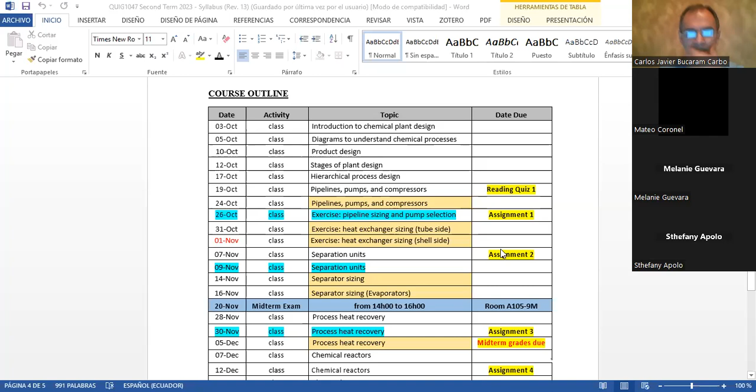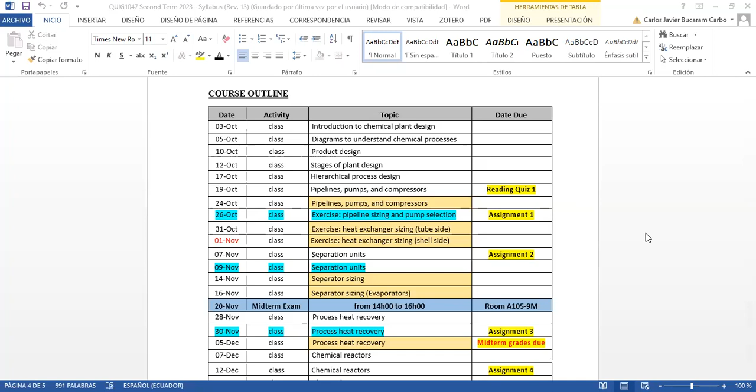We've been discussing pipelines, pumps, and compressors since the 19th, 24th, which was Tuesday, and today hopefully we'll finish the discussion on pipelines, sizing the pumps, and pump selection on this topic of pipes, pumps, and compressors.

Starting on the 31st, we'll have class, and also possibly on November the 1st. As you know, November 2nd is a local holiday, as well as November 3rd. So I sincerely ask you guys to have class on November 1st. It depends on how much progress we make on the 31st, but we might need to have class instead of on the 2nd, because I don't want to unless you guys want to have class on the 2nd, in which case I'll be happy to, since I'm not leaving the city. If you have family commitments and are leaving the city, we can have the class on the 1st instead. I'd appreciate your feedback rather than imposing my own preference, whether you'd prefer class on the 1st or the 2nd.

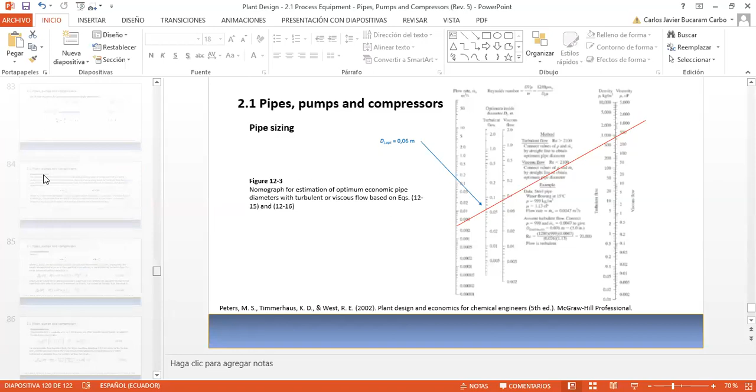Nos dice así. Tenemos un par de ejercicios más, unas recomendaciones generales y luego el tema de Net Positive Suction Head, que es el cabezal de succión positiva.

Cabezal quiere decir columna de agua. Le dicen cabezal, se expresa como cabezal, y si usted habla con un proveedor de bombas, le va a preguntar el caudal y el cabezal. Por cabezal significa la presión o la columna de agua que usted requiere de presión de descarga de la bomba.

Esto es común en los proveedores locales, como Maquinarias Henríquez, como La Llave y otros proveedores más. Eso es usual y es común.

Y los proveedores van a esperar que usted tenga claro su requerimiento, y ellos le pueden asesorar en cuanto al material y al tipo de bomba que ellos tienen disponible, porque en ocasiones ellos importan y tienen en stock ciertas bombas con ciertas características, pero no todas, porque no quieren llenarse de stock que no sale, sino tener stock comercialmente viable: importan un equipo, lo tienen en corto tiempo, lo venden, y esa ganancia la usan para importar otros equipos más. Así funciona todo negocio en realidad.

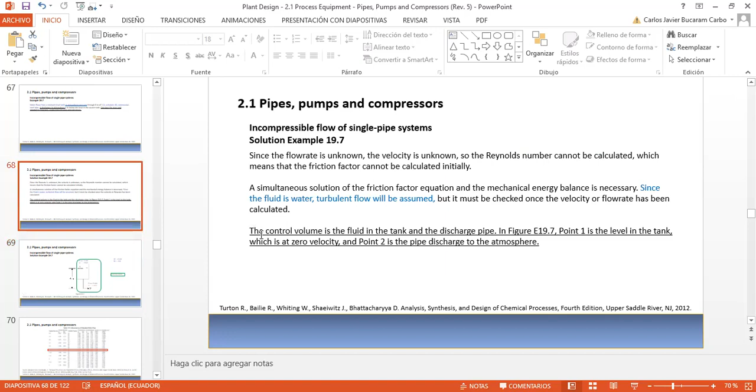What we observe: there is no pump in this system. We only have to analyze what it's asking, which is the velocity, just to make sure. Calculate the mass and volumetric flow rate, neglecting entrance and exit losses. So there is no pump in this system, as you see here.

We know that the source tank is open to the atmosphere, meaning the pressure is 1 atmosphere. This is going to discharge to the atmosphere since there is no pump, so the difference in pressures is going to be 0. The initial velocity on the surface of the source tank is 0, because we can assume it's wide enough so that there is no movement on the surface. But there will be some velocity on the discharge.

So we know that delta P will be 0, because both the discharge is to the atmosphere and the source tank is to the atmosphere. There is no pump, so the work of the shaft is also 0 watts. That's what you see there.

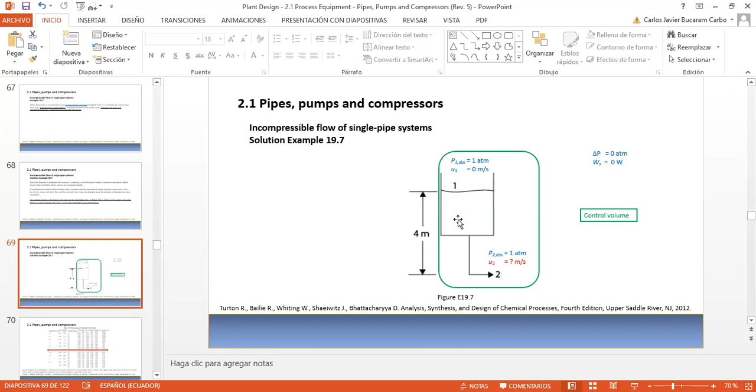So we only have a few terms. The pressure term is 0. We will apparently have some kinetic velocity term, even though it's just 4 meters, because the height is small. It could be considered or it could be neglected. It depends on what the authors consider.

The potential energy term will need to be considered, and the friction term will need to be considered. The power term, the power of the pump, where you have the efficiency, the power of the pump in energy per time, in kilowatts, divided by the mass flow rate in mass per time, that term will be 0 because there is no pump.

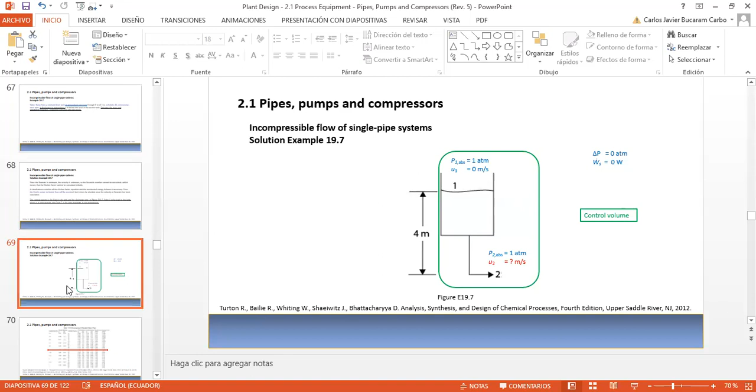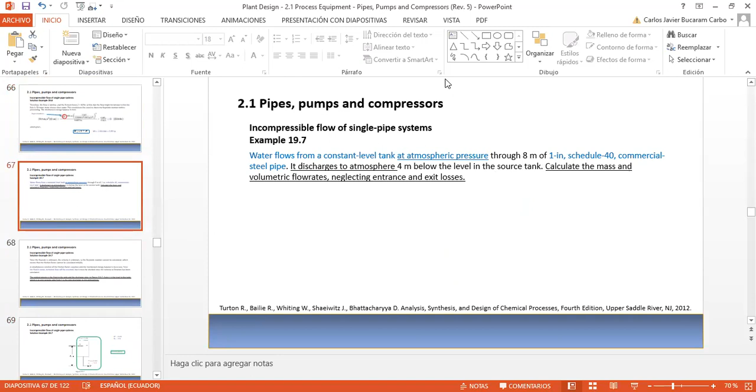We also know that the pipe, let me check really quick. It says it's a 1 inch Schedule 40 commercial steel pipe. So if we check on the pipe, which is here, maybe we can see this a bit better.

The inside diameter is 26.64 millimeters. This table, with all the accompanying sizes, I believe is just part of table 19.1. I think we did review the full table. It goes all the way from very small diameters to big diameters, above 14 if I remember. But we don't need to go all the way — we'll just focus on the diameter of the commercial steel for this particular problem, which was 1 inch.

So the inside diameter, Alexander, is 26.64 millimeters. If we divide by 1,000, that means 0.02664, if I'm correct. That will be the inside diameter.

Okay, so these are the formulas that we have. As we know, there will be no delta P term, or delta P over rho, in the case of constant density. We need this term, we need this term, but we don't have this term because there is no power, there is no pump.

We could consider, if we want to do a strict analysis, some velocity from the surface of the tank all the way to the discharge of the pipe. Although since this is not forced convection — the fluid is not being forced, it's only flowing by gravity — and the height is not that significant, only 4 meters, perhaps this term could also be neglected.

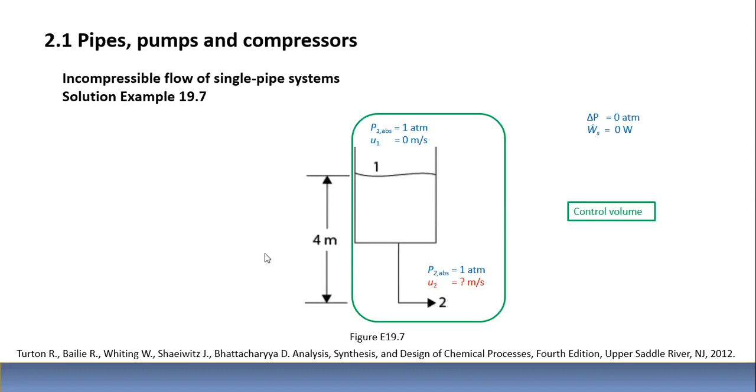Here we know that the roughness factor for commercial steel, if this is in SI units, will be 0.046 divided by 1,000. I believe we're working in SI units. Yes, these are all SI units. So this will be 0.046 divided by 1,000, or 4.6 times 10 to the negative 5 meters, if I'm correct.

Let's check in here. So there we go. There is no velocity in the source tank. There is just velocity at the discharge of the pipe. So that's why the difference between U2 minus U1 is 0.

Squared divided by 2, this is the kinetic energy term. G delta z is a potential energy term. This is the friction term. There is no power term. Is equal to 0. Here, there is a mistake, or an error.

This is plus. There should be a plus. If you follow this expression on the left, you'll see that the expression on the right is missing a plus, because the kinetic energy term is added to the potential energy term, which is added to the friction term. This is not equal to the rest. This is all added up, and everything added up is equal to 0. That's a correct way to interpret this. Okay, so far so good.

But now you could also observe that the friction term is missing 2 things. There are 2 unknowns in here. The Fanning friction factor is not known, because as you see here in equation 19.7b, it is expressed in terms of the Reynolds number, which in turn is expressed in terms of the velocity. We have, what is that? Inside diameter, density, velocity divided by viscosity.

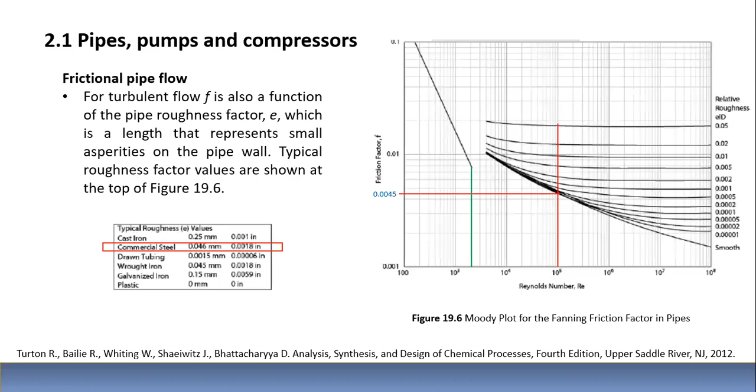Well, the Reynolds number, according to this definition, uses the internal diameter. The density was assumed as 1,000 kilograms per cubic meter, and the viscosity for a non-viscous fluid was assumed as 0.001 kilograms per meter per second. So the Reynolds number was calculated once we knew the correct velocity. The Fanning friction factor, the Reynolds number, and the velocity were found, so we could easily estimate the volumetric flow rate and the mass flow rate.

Now, if we check this on Excel, to see exactly how to go about solving a problem like this, let me show and share this with you guys on Excel.

Okay, so this is example 19.7. You guys can see the Fanning friction factor, we see the velocity V, and based on that velocity we see M, the first and second terms in the friction factor defining equation, and this is what was obtained.

So we're seeing that there was an initial guess. Let me see which one is being used there. Yes, there was an initial guess for the friction factor, which was used to obtain U2.

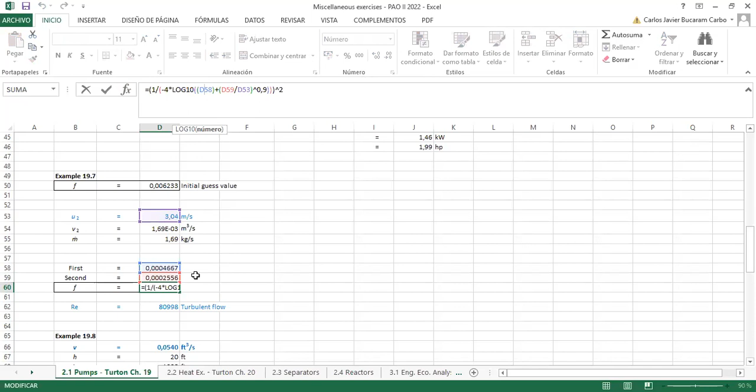So you could do this on Excel. Finally, the Reynolds number also uses the velocity here. We take the velocity as a guess value in order to calculate the friction factor, and then the rest could be calculated. So this is a very simple way to estimate this.

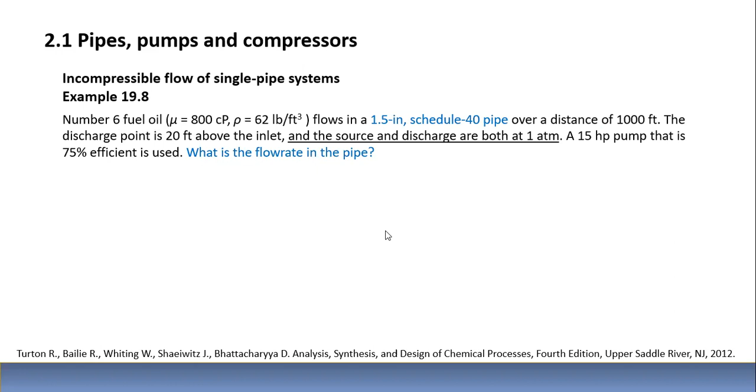It says the volumetric flow rate is an unknown variable. Given the high viscosity, once again, an 800 centipoise fluid is a very viscous fluid. That's why fuel oil 6, bunker fuel, is a very viscous fluid.

It says given the high viscosity, laminar flow is assumed, and that is a correct assumption. So if we assume laminar flow, there is a consequence, and it has to do with the correct expression to determine the Fanning friction factor. If this is a viscous fluid and therefore a laminar flow regime, that means we're not going to use the Blasius equation. We're going to use the Hagen-Poiseuille equation for determining the friction factor in a laminar flow regime, which will be 16 divided by the Reynolds number. Pretty much that's what it would be.

And the Reynolds number should be expressed in terms of the volumetric flow rate. That would be 16 divided by 4 times volumetric flow rate times density, and then pi d mu goes to the numerator, multiplying times 16. So it will be 16 divided by the Reynolds number in terms of the volumetric flow rate. Okay, so far so good. So if we do that, we'll have an expression like this.

This is the potential energy term, the power term, and then this friction term: 32 F L V squared divided by pi squared d to the 5th power. This comes from the friction term.

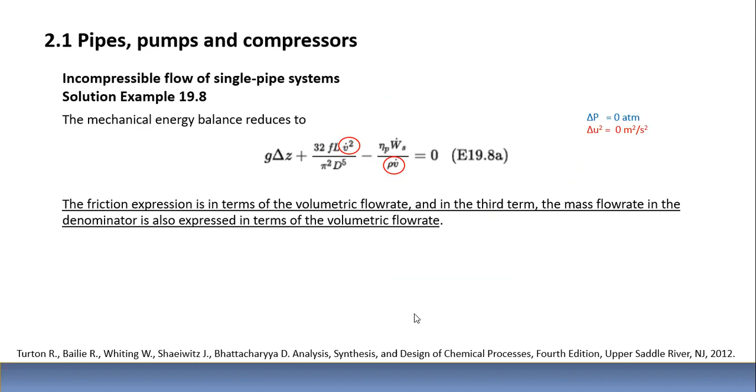But the Fanning friction factor is going to be 16 divided by the Reynolds number. That's why you don't see the friction factor here anymore — it has been replaced by the expression of the Reynolds number.

So the friction factor will be 16 divided by the Reynolds number, which is 4 times the volumetric flow rate times density, divided by pi d mu. So this is pretty much 16 over the Reynolds number.

And this is F. So we have 32 times F times L times the square of the volumetric flow rate, divided by pi squared d to the 5th, as the expression here.

Now you can cancel out pi, since you have pi here but only to the power of 1. For d, you have d to the power of 4. For the volumetric flow rate, you can cancel this out to get volumetric flow rate to the 1st power.

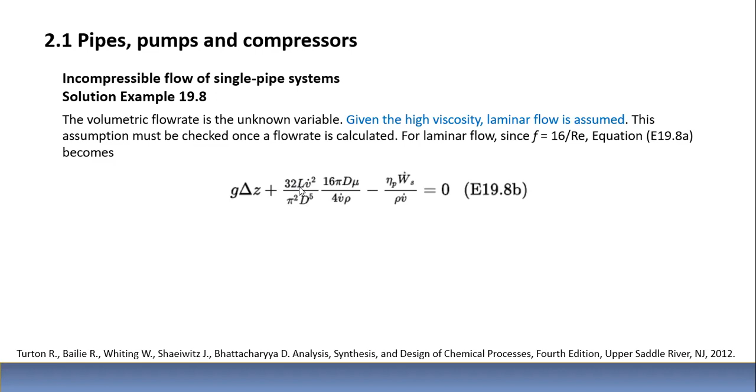Then you have 4 times 32, since you cancel this out, which is 128. And then you obtain what you see here. This is the potential energy expression, and this will be the friction term.

This includes the friction factor in terms of 16 over the Reynolds number for a laminar flow regime, using the Hagen-Poiseuille equation, and the power term also expressed in terms of the volumetric flow rate.

Once again, we need to guess a value, and for this we will use an Excel spreadsheet. Once we add the 3 terms, it should come to be 0. When that happens, we have found the correct volumetric flow rate in cubic feet per second.

And then the Reynolds number can be expressed in terms of the volumetric flow rate. We could use that calculated volumetric flow rate to determine its value. It comes out to be 59.1.

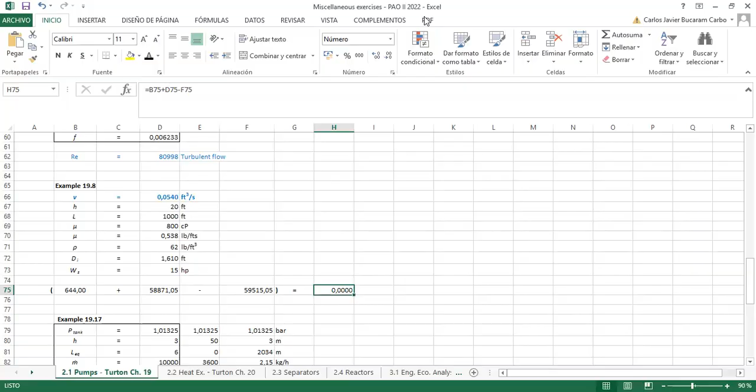Vamos ahora a recomendaciones para solucionar este tipo de ejercicios, recomendaciones generales. No sé si las escribí basadas en el libro o si simplemente estaban en el libro, no recuerdo para ser exacto. No sé si la escribí como recomendación para la clase de aquel entonces y la dejé aquí, pero creo que son recomendaciones buenas de meditar para la resolución de este tipo de problemas.

Nos dice: draw the specific conditions described in the problem, start with the mechanical energy balance, determine which terms of the equation 19.5 are not applicable to your problem, confirm if the remaining terms of the equation 19.5 are indeed applicable. Puede decir si usted necesita el término de velocidad, de presión, si usted necesita el término de potencia, posiblemente no lo necesite. Tiene que estimarlo según la realidad de su problema, la descripción, el enunciado de su problema.

Determine if the flow is turbulent or laminar using the Reynolds number. Obtain the friction value using the expression applicable to your flow condition, that is equation 19.16 for turbulent flow, equation 19.15 for laminar flow. Para flujo laminar se usa la ecuación Hagen-Poiseuille, 16 sobre el número de Reynolds. Para flujo completamente desarrollado, turbulento, se usa la ecuación de Pavlov y sus demás compañeros de investigación, citado por Levenspiel, eso lo vimos el martes pasado. Es una ecuación un poco más complicada, ya la hemos citado varias veces, ya ustedes están al tanto de esto.

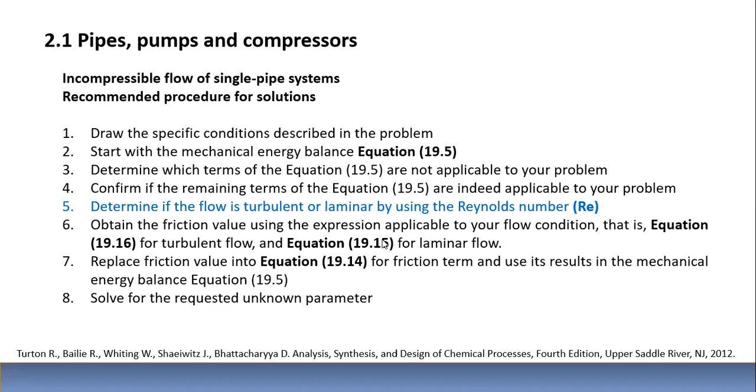Replace the friction value in equation 19.14 for the friction term and use its results in the mechanical energy balance equation 19.5. Solve the requested unknown parameter. Son recomendaciones generales y quizá puedan servir.

Ecuaciones que hemos visto. Aquí está la ecuación para flujo turbulento, de Pavlov y sus compañeros de investigación, se dice coworkers en inglés, sus co-trabajadores o co-investigadores. Normalmente las investigaciones y los papers que se publican, quizá como el paper que ustedes leyeron, se hacen en grupos de investigación. Pavlov fue quizá el mayor contribuyente a esa investigación, por eso tuvo el privilegio de aparecer como el primer autor, pero los demás autores contribuyeron en cierto modo, por eso son citados en el artículo. En el caso del flujo laminar, pues solo se lo cita.

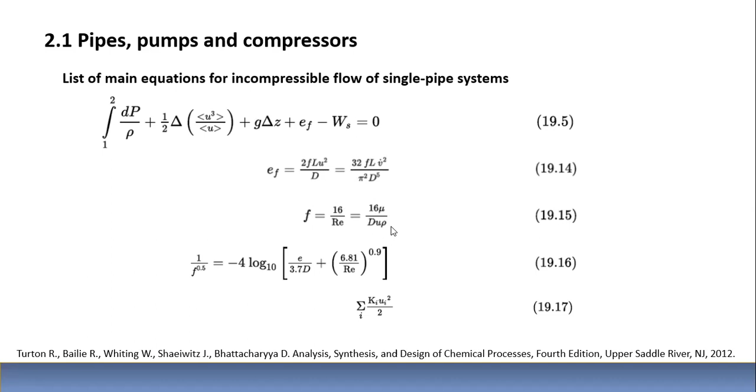Está Hagen-Poiseuille, que son los dos autores, el señor Hagen y el señor Poiseuille. Ellos determinaron que esta era la expresión apropiada para el flujo en el régimen laminar. Muy bien, y demás expresiones.

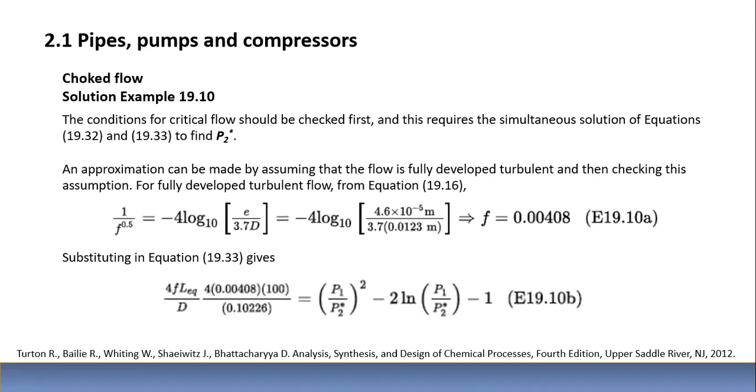Flujo compresible nosotros nos vamos a saltar porque el tiempo nos apremia, y flujo estrangulado también nos vamos a saltar. Entonces vamos a caer específicamente en Net Positive Suction Head, NPSH, y con eso concluimos. Nos dice: there is a significant limitation on pump operation called Net Positive Suction Head, NPSH. This is the head, el cabezal, como le dije, columna de agua en pies o en metros. This is the head that is needed on the pump feed, en el lado de la succión.

Usted necesita cierto cabezal en la succión, porque la bomba no puede succionar gases. Una bomba centrífuga no puede succionar, y también una bomba de desplazamiento positivo no puede succionar, se va a terminar estropeando. Una bomba industrial tiene el cabezal, su eje conectado con el eje del motor, ambas sobre una base, y esto conectado con un matrimonio. El matrimonio es la conexión entre el eje del impulsor o impeller en inglés y el eje del motor de la bomba, un dispositivo de lado y lado que acopla ambos ejes, y lo llaman matrimonio. Una bomba así puede costar sobre los $10,000.

Usted no quiere arruinar el eje de una bomba así, que no va a dejar de costar algunos cientos de dólares. Sería inexcusable que, conociendo que una bomba centrífuga no bombea gases, no tomemos las precauciones para que en la succión nos aseguremos que está saturado el líquido con suficiente presión en la succión para que la bomba pueda arrancar y operar, y pueda desalojar o desplazar líquido.

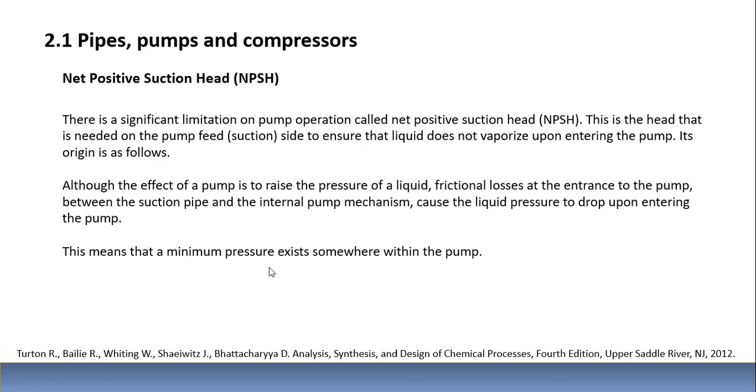This is the head that is needed on the pump feed side to suction side to ensure that liquid does not vaporize upon entering the pump. Its origin is as follows. Although the effect of a pump is to raise the pressure of a liquid, frictional losses at the entrance to the pump, between the pump, the suction pipe, and the internal pump mechanism, cause liquid pressure to drop upon entering the pump. This means that a minimum pressure exists somewhere within the pump. If the feed is saturated or nearly saturated, the liquid can vaporize upon entering due to the internal pressure drop. This causes formation of vapor bubbles.

These bubbles rapidly collapse when exposed to the forces created by the pump mechanism, called cavitation. This process usually results in noisy pump operation that, if it occurs for a period of time, will damage the pump. As a consequence, regulating valves which lower fluid pressure are not normally placed in the suction line to the pump. No ponemos válvulas que regulen el flujo en el lado de la succión porque no queremos estrangular el flujo en el lado de la succión.

Hay un video de menos de un minuto, que aunque el tiempo apremia, puede ser que lo podamos ver. Es un video que ilustra el tema de la cavitación. Vamos a ver si lo compartimos aquí. Es un video corto y lo podemos ver.

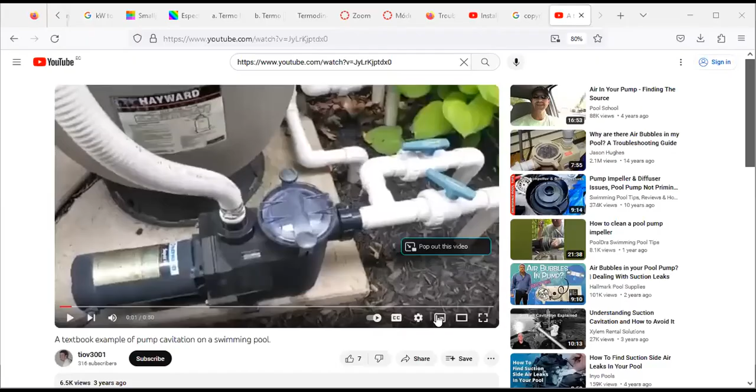Muy bien, corremos esto. Escuchen y miren lo que está ocurriendo.

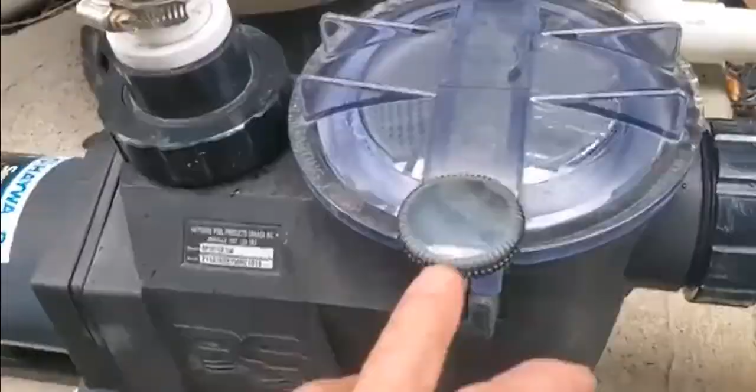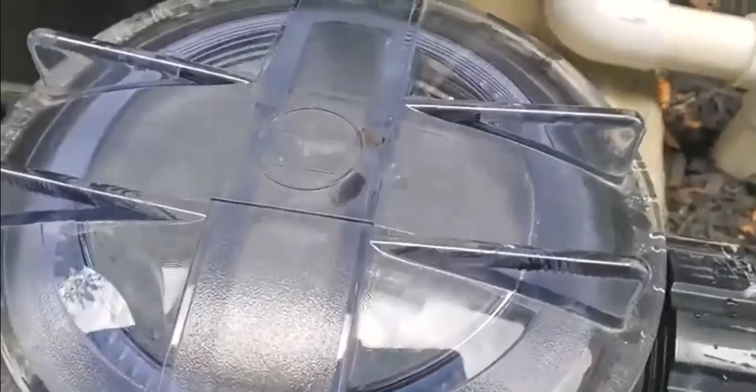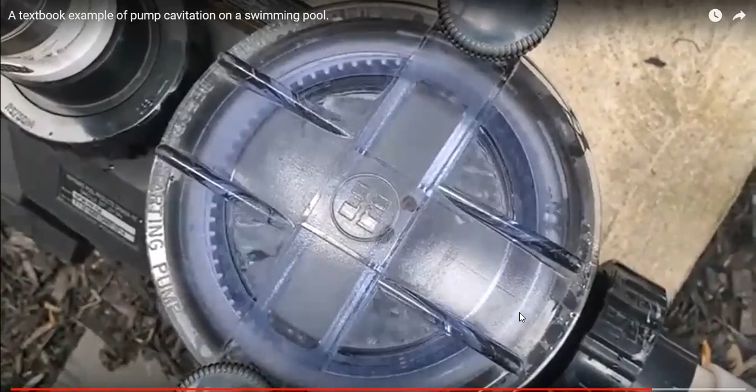Lo que hizo él es estranguló el flujo de salida. Sí, estranguló el flujo de salida y se pudo mejorar. ¿Vieron el escándalo que estaba haciendo la cavitación de esa bomba?

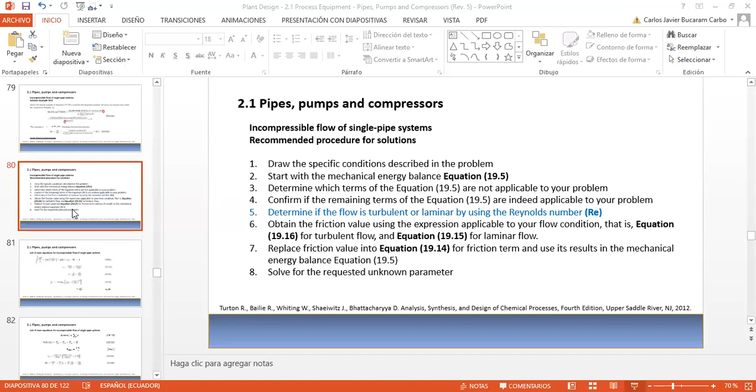Muy bien, vamos avanzando en Net Positive Suction Head. Nosotros vamos aquí, estamos aquí, correcto. Pump manufacturers, vamos a ver este tema acá.

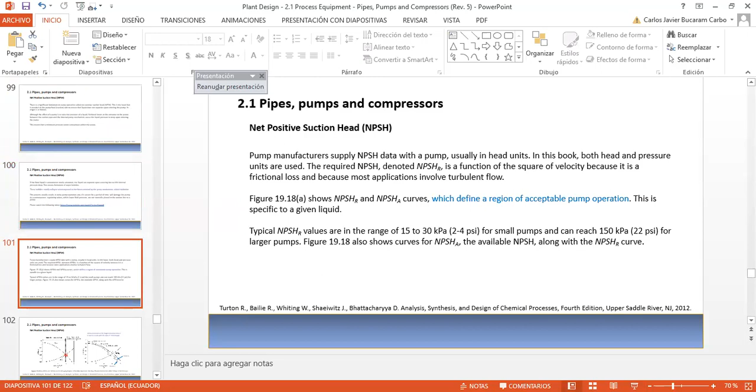Pump manufacturers supply net positive suction head data with the pump, usually in head units. In this book, both head and pressure units are used. The required net positive suction head, NPSHR, is a function of the square of velocity because it is a frictional loss, since most applications involve turbulent flow. Figure 19.18A shows net positive suction head required and net positive suction head available curves, which define a region of acceptable pump operation. This is specific to a given liquid. Typical NPSHR values are in the range of 15 to 30 kilopascals for small pumps and can reach 150 kilopascals for larger pumps.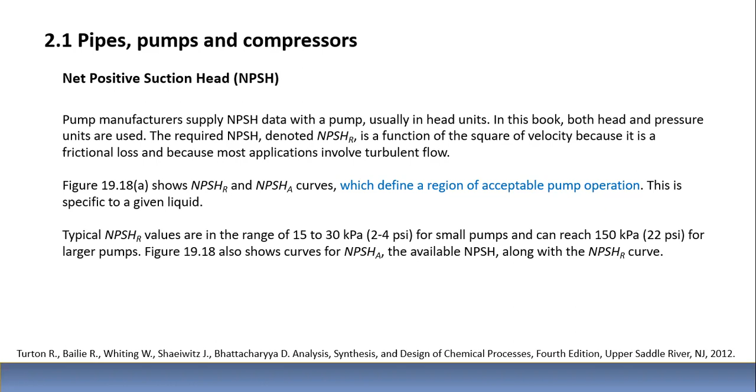The available net positive suction head is defined, as you see in equation 66, as the inlet pressure minus the vapor pressure. It is required that the available NPSH be bigger than the required NPSH to avoid cavitation. Cavitation is avoided if operation is to the left of the intersection of the two curves. It is physically possible to operate to the right. Puede usted operar hacia la derecha de esta intersección de las líneas requeridas y disponibles.

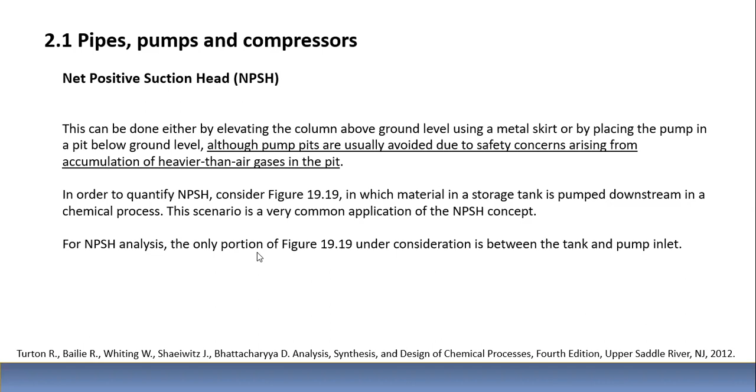In order to quantify NPSH, consider figure 19-19, in which material in a storage tank is pumped downstream in a chemical process. This scenario is a very common application of the NPSH concept. For NPSH analysis, only the portion of figure 19-19 between the tank and the pump inlet is considered.

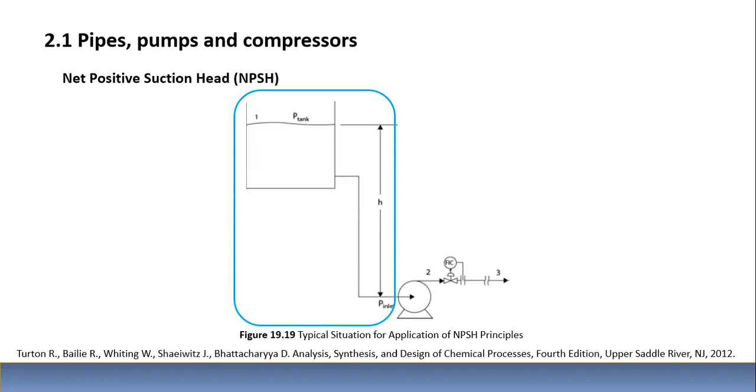This means that the pump inlet pressure equals the tank pressure plus the static pressure minus the frictional losses in the suction side piping. Therefore, substituting equation 67 into equation 66, we solve for the pump inlet, which is equal to NPSHA plus P star.

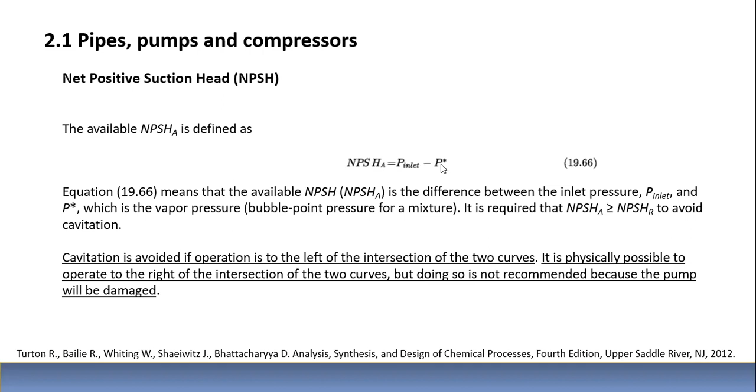And then we move P star to the right, we end up with equation 19-68, which is this expression: the available net positive suction head is equal to the tank pressure plus the static pressure minus the friction term minus the vapor pressure. This is an equation of a concave downward parabola of the form A minus BU squared.

As illustrated in figure 19-18B, curve A, we have that curve here, this concave downward curve is curve A. The intercept is expressed in this expression, and this is the slope, expressed by this expression.

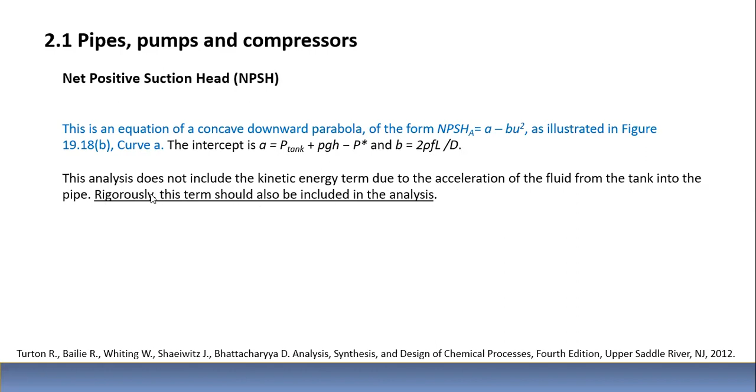This analysis does not rigorously include the kinetic energy term due to the acceleration of the fluid from the tank into the pipe. This term should also be included in the analysis. We're almost done.

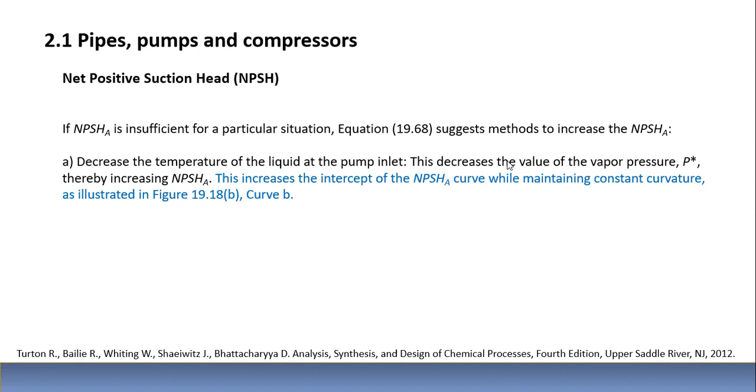If NPSHA is insufficient for a particular situation, equation 19-68 suggests methods to increase the net positive suction head. Decrease the temperature of the fluid at the pump inlet, because this will decrease the vapor pressure. I'm going to go a bit fast here.

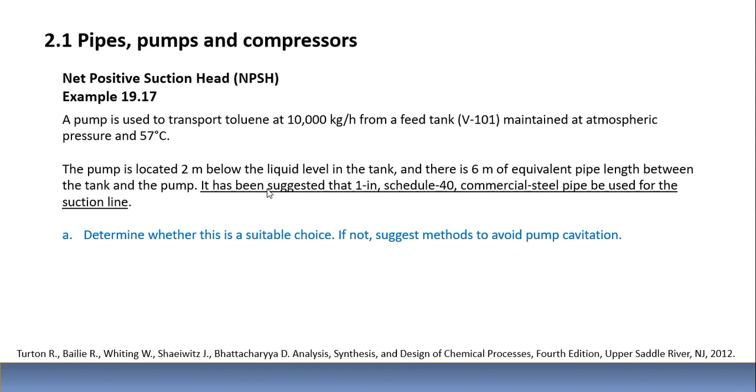Básicamente eso es, un tubo de 1 pulgada cédula 40 de acero comercial. Y aquí usamos la ecuación 68, si estoy correcto. The following, esta es la ecuación 68. Correcto. The following data can be found for toluene.

Tenemos la ecuación de presión de vapor del tolueno, la viscosidad del tolueno a 57, la densidad del tolueno a 57, y para un tubo de cédula 40 de 1 pulgada, estas son las dimensiones. El factor de rugosidad, 0.0011, el diámetro interior, 0.02664 metros. Therefore, the velocity of toluene in the pipe can be found to be 5.73.

Haciendo las estimaciones, the Reynolds number is about 426,000. The friction factor is 0.005 at 57 Celsius. The vapor pressure is found to be 0.172.

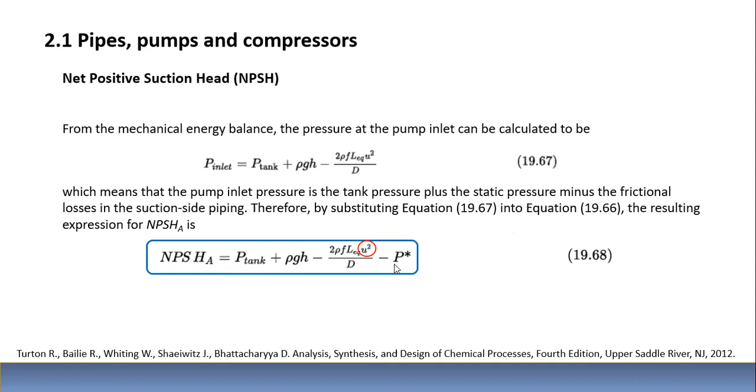Entonces, haciendo el cálculo, y lo vamos a ver también en Excel, de la ecuación 68 que tiene estos cuatro términos: el término de la presión del tanque, el término de presión estática, el término de fricción en términos de velocidad, y el término de presión de vapor a una determinada temperatura, se obtiene que con un tubo de 1 pulgada, el cabezal disponible positivo en la succión es 0.37 bares.

This is shown as point A on figure 1918B. At the calculated velocity, figure 1918B shows that the net positive suction head is 0.4. Es decir, según este gráfico, el punto A, que es para un tubo de 1 pulgada, cédula 40, 2 metros con fluido a 57 centígrados, nos da aproximadamente 0.4.

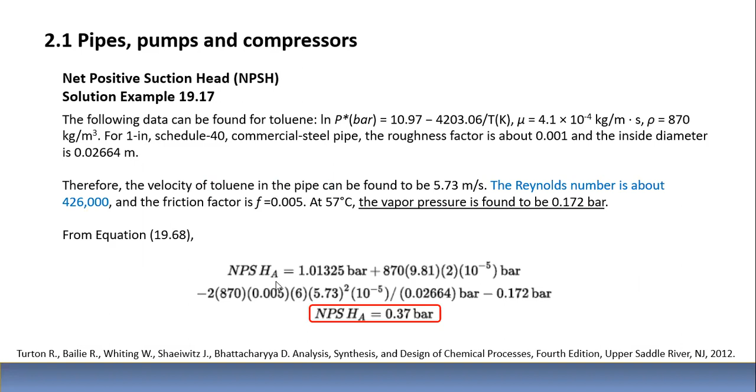Pero el disponible calculado, porque este es net positive suction head available, el disponible es 0.37. El disponible tiene que ser un poco mayor al estimado mediante el gráfico que usted ve en la línea que está en celeste.

Therefore, there is insufficient NPSHA. This means that the 1-inch schedule 40 pipe is unacceptable for this service. The obvious solution is to use a larger diameter pipe for the suction of the pump. The calculated velocity, 5.73, is far in excess of the typical maximum liquid velocity.

Intercambiadores de calor se usan a velocidad 1 metro por segundo, vea usted. 5.7 es simplemente una velocidad excesiva debido al estrangulamiento que está teniendo por el tubo de un diámetro pequeño.

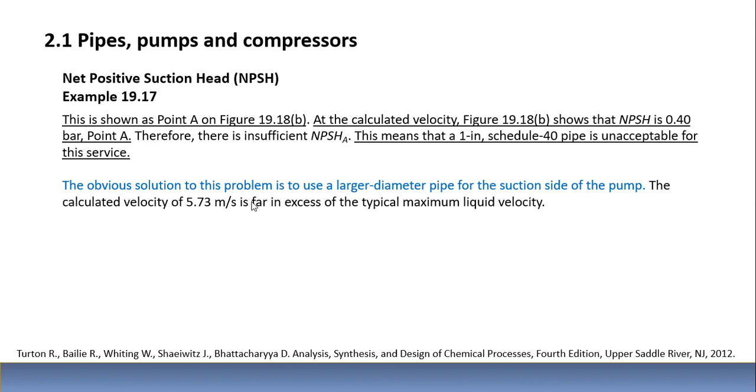The frictional loss, sí, con eso creo que terminamos. Vemos el Excel y ahí acabamos. The frictional loss in the 6-meter suction pipe is approximately 0.64.

If a 2-inch schedule 40 pipe was used for the suction line, then the frictional loss would decrease to 0.02 bars, and NPSH would increase to about 0.99, which is far in excess of the required NPSH.

Another method, como vimos, el requerido es 0.4, ¿no? Si se dobla el diámetro de tubería a 2 pulgadas, tendríamos un NPSH-A de 0.99 en lugar de 0.37, y estaría muy por encima de 0.4.

¿No? Another method for increasing NPSH-A is to increase the height of the liquid in the tank. If the height of the liquid in the tank is 3 meters, the 1-inch schedule 40 pipe at the same temperature will give 0.445. Y eso lo podemos ver aquí en point B.

En esta curva, que es de 1 pulgada, cédula 40, a 3 metros y 57 grados, es decir, es igual a la de acá, el mismo tubo con la misma temperatura, pero en lugar de 2 metros, tiene 3 metros. Mire cómo la curva del NPSH disponible se corrió hacia la derecha.

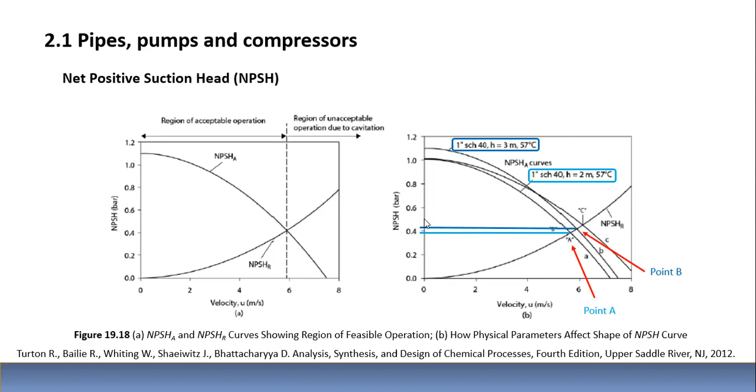Y nos dio también un NPSH de aquí, aproximadamente 0.45 o algo así. Y nos dice que nos dio acá 0.445 según seguramente la fórmula 19.68. This is shown as point B in figure 1918.

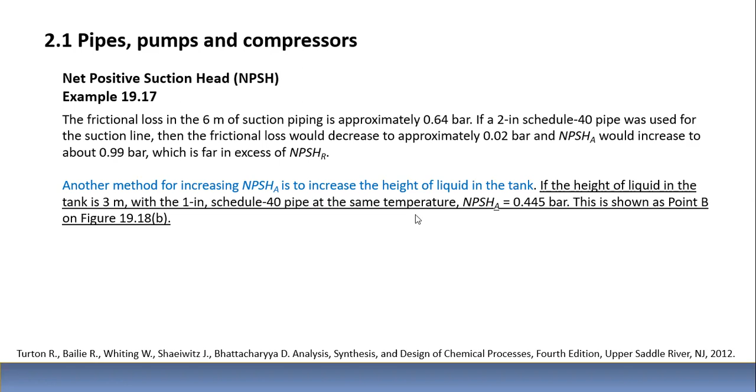Es decir, sería más conveniente, en otras palabras, levantar la tubería. Es más caro cambiar todo el tubo, reemplazar el tubo, y es más fácil añadir 1 metro más de tubo del mismo tipo y conseguir un resultado más aceptable. Finalmente tenemos estas tres.

Vamos al Excel y se acabó. Dice, the derivation, ojalá no se enoje conmigo, Fernando, tengan un poco de misericordia, ¿no? Me he pasado unos minutos.

The derivation of equations for determining optimum economic pipe diameter is presented in chapter 9. This is Peters. Estamos en Peters Timmerhaus, es un par de diapositivas porque es un resumen muy interesante en cuanto a determinación del diámetro óptimo, basado en el número de Reynolds y el diámetro de la tubería.

The following simplified equations can be used for making these design estimates, for the design estimation of a pipe's diameter. For turbulent flow above Reynolds number 2100, with internal diameter above or equal to 1 inch, this would be the equation.

For viscous flow with Reynolds number below 2100 and internal diameter equal or below 1 inch, this would be the appropriate equation. Where D i,opt is the optimum pipe diameter, and V is the volumetric flow rate in cubic meters per second, rho is the fluid density in kilograms per cubic meter, mu sub F is the fluid viscosity in pascal seconds.

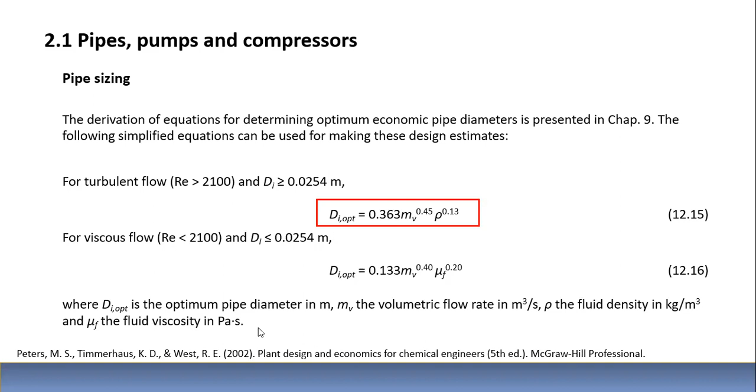And finally, the preceding equations are the basis for the nomograph presented in figure 12.3. This is a nomogram that can be used for estimating the optimum diameter of steel pipe under normal process conditions. Equations 15 and 16, these two, should not be used when the flowing fluid is steam, because the derivation of these equations makes no allowance for the effects of pressure on the conditions of the fluid. Equation 15 is limited to conditions in which the viscosity of the fluid is between 0.02 and 20.